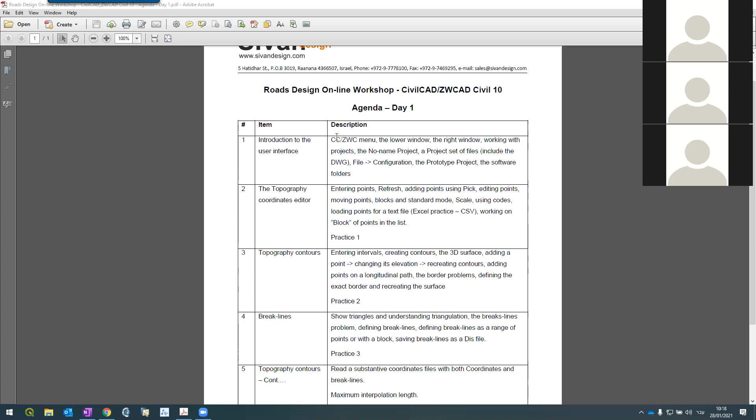We'll go to the topography coordinates editor. How do we enter coordinates? How do we load the coordinates? How do we pick coordinates from the drawing and put them in the list, and vice versa? We'll go through how to use codes. I will explain later how to read from a text file, or in our case, a CSV file, which is actually a text file from Excel. And then we'll see how to manipulate a list of points together as a block.

We'll go to topography contours. We create contours, we understand the concept of 3D surfaces. We'll add points, change elevation, and recreate contours.

Then we'll do a small study that will show you what we call the low border problem and how to overcome it, how to define the border. We'll go into a term named breakline - what it means, where it's coming from, how do we create and save breaklines. Then we'll continue with topography contours with a much bigger file, and talk more about borders and method names, maximum interpolation length. We'll end with something called filtering - a method where you don't have a text file, data, or breaklines, but maybe you have a DWG drawing file, and you can extract the data from it, convert it to your 3D surface, and continue working.

I hope I'm not too fast, and I hope all of you can hear me. Just as a quick feedback, let's start with Gal - am I too fast or is it okay? It's okay. Same for Esomachi - can you understand, can you follow up? Okay, for you, I see you don't have a mic. Let's try with Dareen - is it okay? Madame Dareen, can you hear me? Yeah, it's okay. All right, thank you very much.

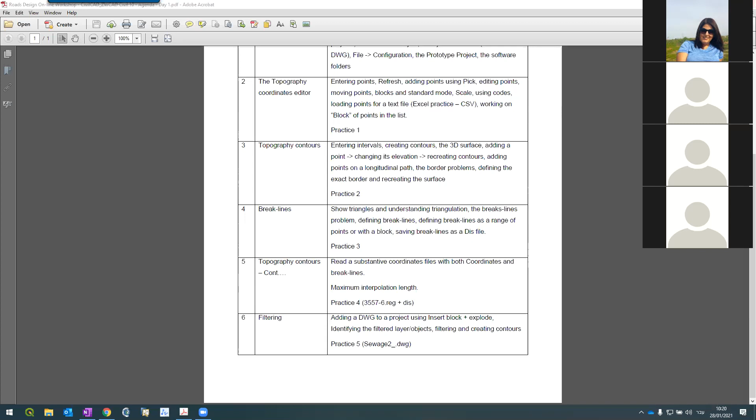Okay, let's not waste time and go into the system. The training is built up in a way where I do the introduction or demonstration on the software, and then after that, I'll give you practice time to try it on your own. So let me start - I'm starting the system.

It launches, and immediately when it launches it starts the drawing environment. I'm using ZWCAD. What is ZWCAD? I'm not here to sell it, but ZWCAD is actually AutoCAD, a Chinese version of AutoCAD. In my opinion it's equal to or sometimes even better than AutoCAD, and believe me, I'm 20 years in this business. But if you like, you can still use AutoCAD if you prefer. In my opinion, ZWCAD is faster and works exactly the same - this is the advantage.

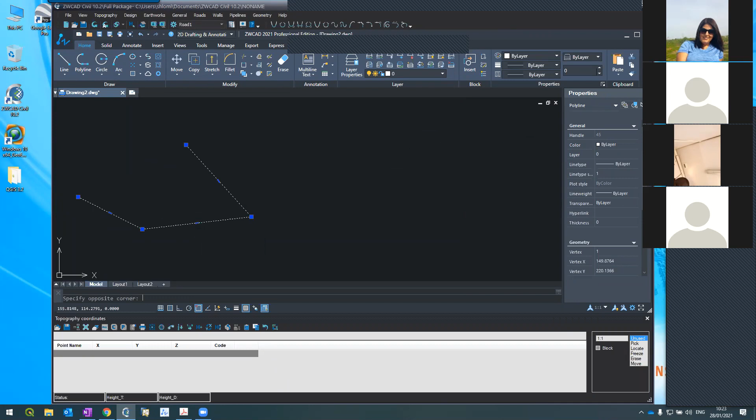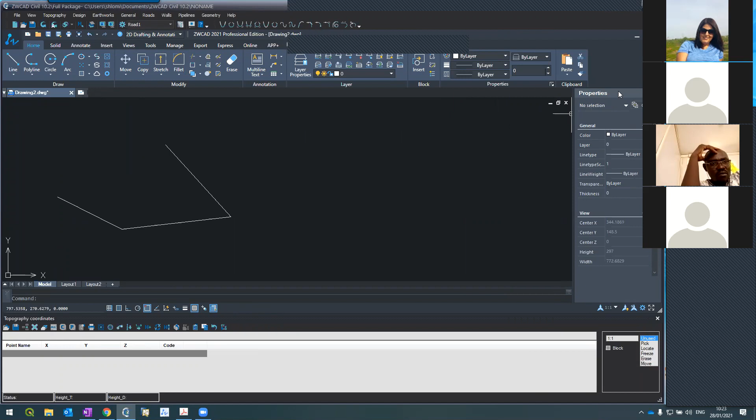Look, this is the command line. If I do a polyline here - same polyline. I want to see its attributes; it will be here. You'll see the properties - if you want to change color or layers, all the commands you know from AutoCAD are here. All the buttons, stretch, everything is here, all the menus and ribbons. It's AutoCAD - it's actually AutoCAD, just faster and more cost effective. So I'm introducing ZWCAD, but you can work with AutoCAD - for me it's the same, whatever works for you. But I encourage you to work with ZWCAD.

Let me continue - this is the drawing environment. On the top, I hope you can follow my arrow, we have the menu of ZWCAD Civil, which is actually CivilCAD - CivilCAD is ZWCAD Civil, it's the same product. Below that you see the toolbars of CivilCAD or ZWCAD Civil - we'll learn about them. Here is your standard ACAD, ZWCAD, AutoCAD - it's the standard. Below we have what we call the coordinates editor. It's an editor, I can type in things here. We will deal a lot today with this editor, but we'll talk about it in a minute.

So this is just an introduction. Very important - I'm working now on a project named No Name. You can see it in the caption on top, showing the full path and saying No Name. All of you, be alarmed not to use No Name - very important, don't use it. Why? Because everything you put in No Name, later the system may erase it and you'll not succeed to save. Don't use No Name - every project should start as a new project. So actually we have two important projects: one is No Name, and the other we call prototype. Prototype - so again, No Name and prototype are the most important projects which we have.

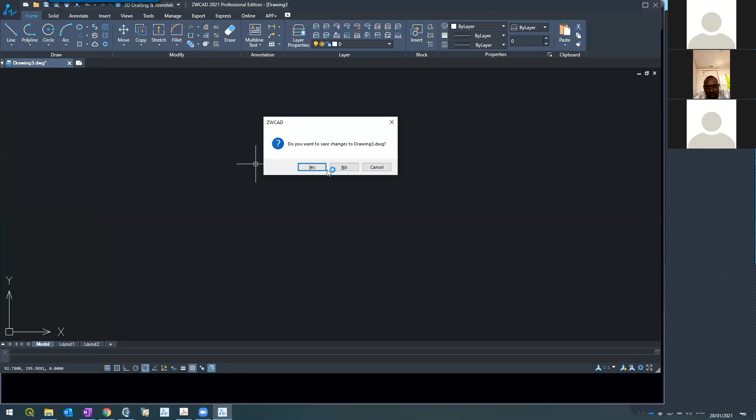Yeah, but let's continue. So what I did, I came here, I did my change, File, Exit, save the changes, and that's it.

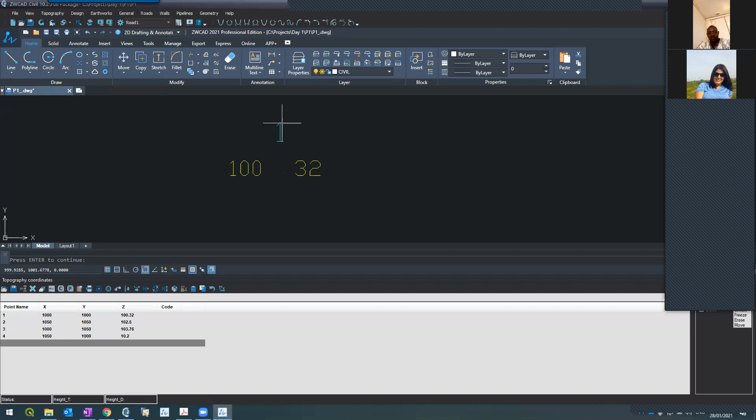The insertion point of the block is 1000, 1000 on elevation 100.32. So actually it's a 3D block where its insertion point is at the coordinate. Actually the insertion point is where the decimal point is, so it's this small one here.

And the same goes here, and the same goes for point 3 and 2. Fine, nice. How do I increase the size of the block?

I don't know if you remember what we said, that our project should work with a scale of 1 to 250. So the software took 250 and created the block size with its attribute ready for 250.

But if I go here in the topography coordinates and press this button, we call it options, I see the options window where I can change and manipulate these things. Now I'm working on topography, on the coordinates, because I have many things in the topography. On my coordinates, I want that my text will be adequate for a scale of not 250, but 500, and I would print.

Press OK, and refresh again. You saw what happened? Immediately the size changed. Let me do it again.

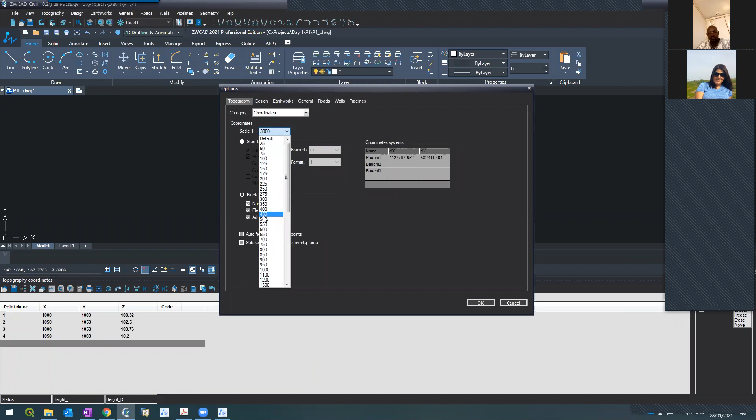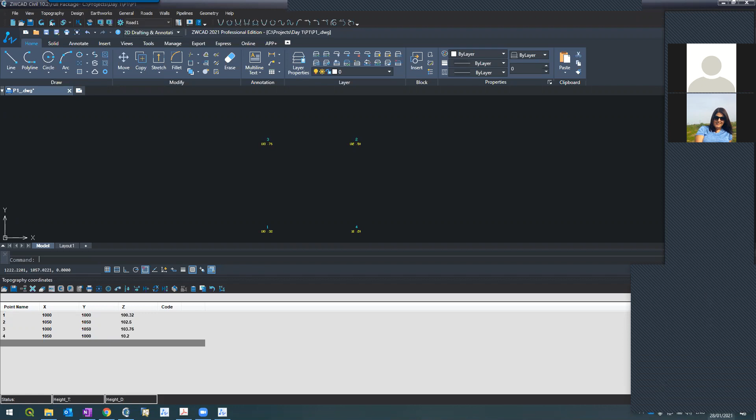Any questions so far? I will give you time to practice, don't worry, but I'm asking whether you have any questions so far. Guys, Techno Spark 4, any question? Are you with us? 8910303, are you with us? Can you follow? Okay. Adamo, Mr. Adamo, can you hear? Yes, yes. Okay, good, no question for now. Thank you. Rose, any question? Rose, questions? We cannot hear you, just write me if everything is okay. Okay, I hope you can follow up. It's very important, it's very important.

What I will do now, you remember I entered coordinates here, pressed refresh, and it showed on the window. Now I'll do a different thing.

What I will do now is use the pick function here. See, I'm going down. Everything below here in this window relates to topography coordinates. So if I go here to pick and press, see what happened in the command line: it says pick point, and gives it a number, 1005. I want to call it point number 100, so in the command line I'm entering 100, and it changed to pick point 100. I'm going to the drawing.

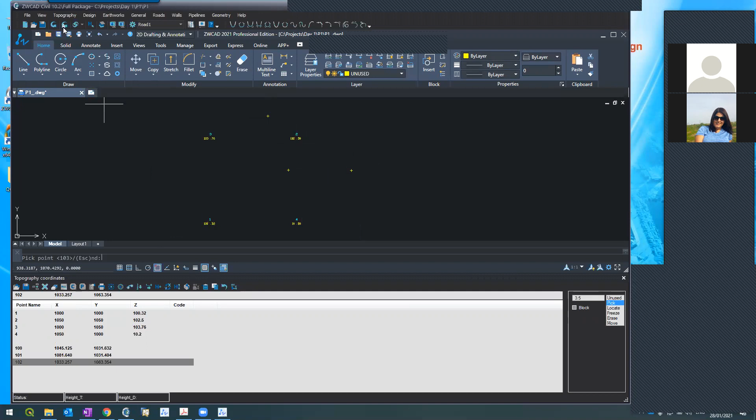And I pick the point here. See what happened here? It created the coordinates, giving it 100 and the coordinates. I'm putting one here and another one here. I'm pressing refresh. Here they are, the points, of course at zero elevation because we didn't give anything.

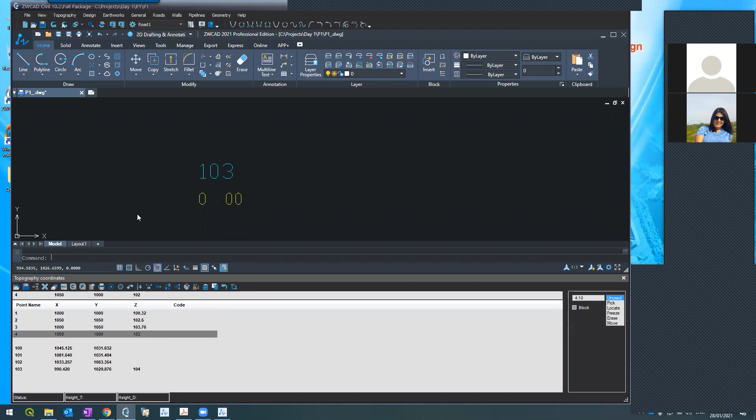So again, pressing pick, it says in the command line pick the next point. I'm clicking somewhere, it shows here. If I refresh, I'll see it completely. I want to change the elevation of 103. I pick it here in the list, come to it in the editor, change it to 104, and press refresh. Here it is, 104. And so on, so forth.

Okay, so we saw how to do pick. We saw that there's a complete interaction between what's going on and the drawing.

But I can also add something else. For example, let's say that point number 3, when I pick it in the field, I've noticed that it's a tree. And in my GPS or total station, I collected it as point number, coded as a tree. I'm going to point number 3, you see the last column, it says code. I'm entering 60, pressing refresh.

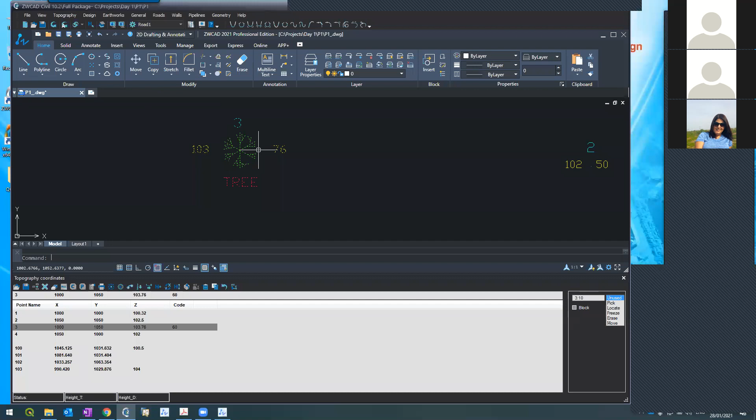And it becomes a tree. See? I entered 60 here, and it became a tree. Let's do the same for 101. I know that 101 is a tree as well.

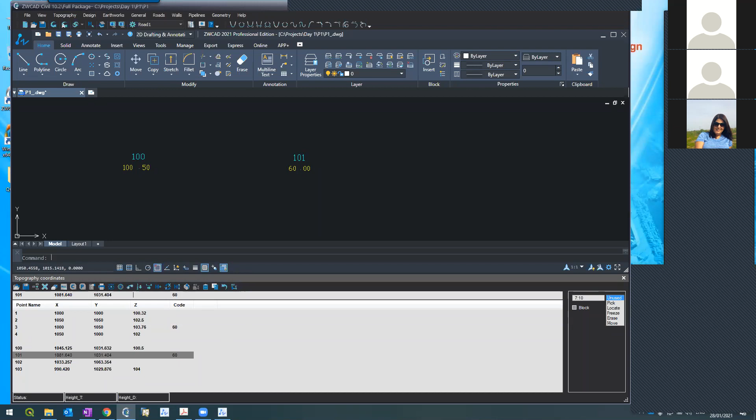60. Sorry, 60 is it. I need to give it a height. We did 0 and 60. Here it is. It's a tree. I hope you got it.

So how do I know these codes? If I go to where my data is stored, in Documents, ZWCAD Civil, you'll see there is a codes folder. If I go to main DWG and open it with AutoCAD or ZWCAD, it's not so important. I started a new ZWCAD. Sorry, not this one, I made a mistake. If I go to main symbols, you see?

Here we are, all these are my codes. So once I have 60, where was 60? Here it is, tree. I have pine, I have invert level. I have for valve, for example.

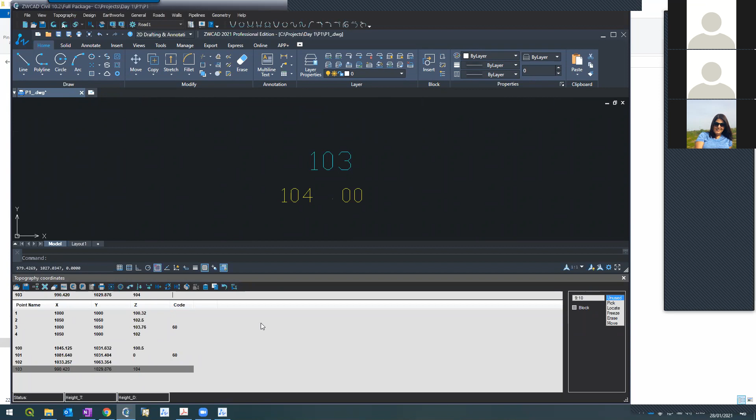47 is a valve. Let's try it in my ZWCAD Civil, 47. I will take this point, 103, give it 47 in the code. All right, you see, it's a valve. So here it is, these are the points, these are the codes.

I hope you got it. And what I'm going to do now is create a file in CSV, load it in the system, and continue from there.

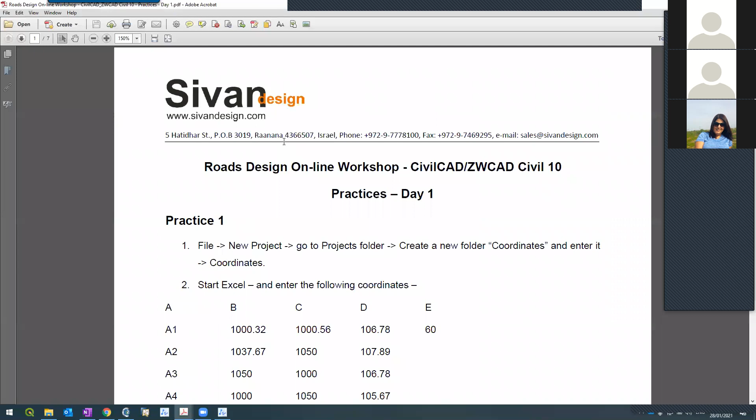So what I'm going to do now with all of you, I'm going to share with you a file which I prepared for this specific training. This is the file. What I want you to do is to all look at the file and practice it. So I'm putting it here. Here it is. Take now 10 minutes and practice the file.

Marina, do you remember how to, I don't know, even if it's possible, how to share with them? Can I share with them the file? Can I send it to them? Is it like Skype? Does it allow sharing a file? Send them a file. I'm not sure, let me check just a second.

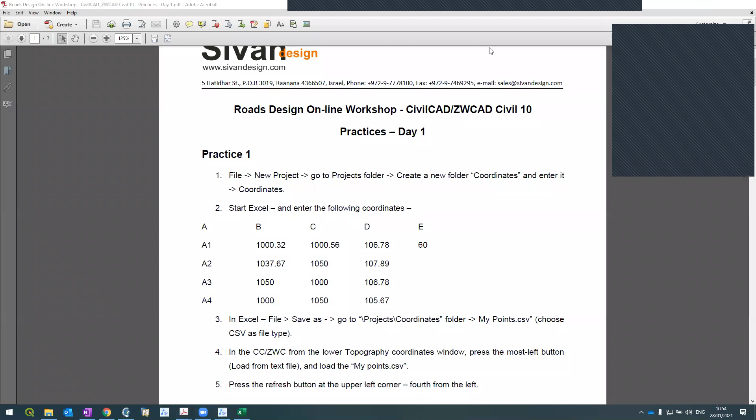Can you hear me? Yes, who is talking please? Gal. Yes please, yes madam. I try to open the ZWCAD and it's not working. Okay, it has ZW, a what? Yes please go ahead. It had a problem to open this, so I don't know. The problem is from the ZWCAD or from ZWCAD Civil? It wrote the license details don't match computer specification, please contact support for further assistance. Okay Marina, can you take control offline and try to solve the problem for her? Yes of course. Okay, try to do it now so she can continue with us. Okay, thank you, thank you.

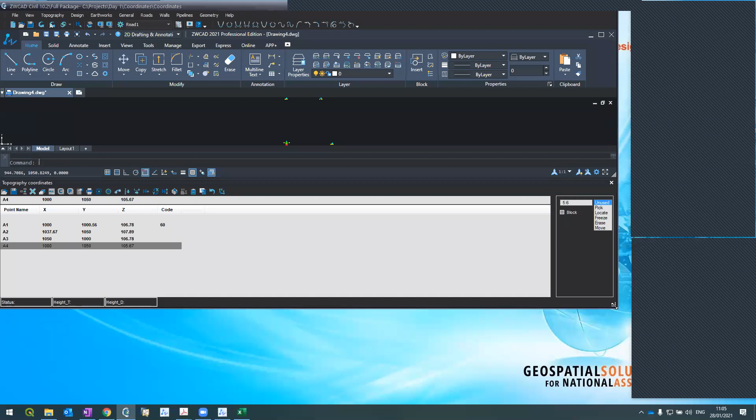What I'm gonna do now, I'm gonna continue to topography contours. So all of you please follow along. I'm going here in the topography contours, and on the right I can see a new window, the topography contours window.

I'm going to intervals and I key in 0.25, which is the vertical interval, and I press apply. Here it is. With 4 points, the system creates contour lines between my 4 points. Moreover, the system creates a 3D surface between these 4 points.

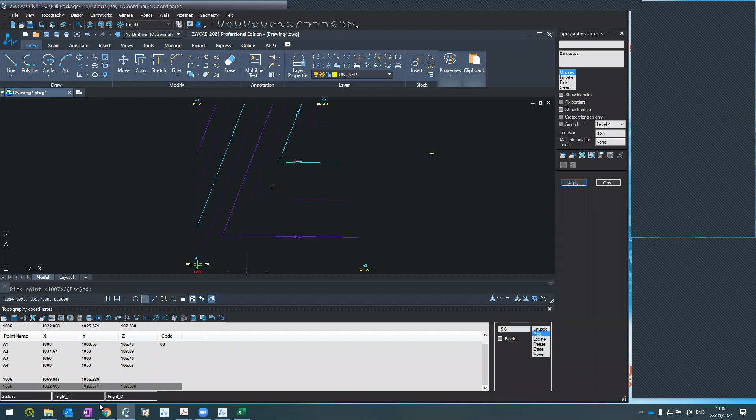That means that if I take my pick, which I used before - you remember when I picked a point outside of the surface, it gives me x, y. But if now I go inside the surface and pick anywhere, even here, automatically I'll get the z as well. See, x, y, z. You can try it. When I press refresh, here it is, 1006. Excellent.

If I take now 1006 and change its elevation, instead of what was existing, I will change it to 112. Press refresh and apply on the right side again. The contour line will change accordingly. I hope you succeeded to follow up.

Again, I went to this point and changed its elevation. This is 106, you see it here? And change its elevation to be 110.55. I'll refresh first, and then I apply again. You see, it's changed accordingly, and moreover the surface changed accordingly. I hope you got it.

Any question to what I just did? Anyone, question? You can speak up, you can write. If not, I will continue.

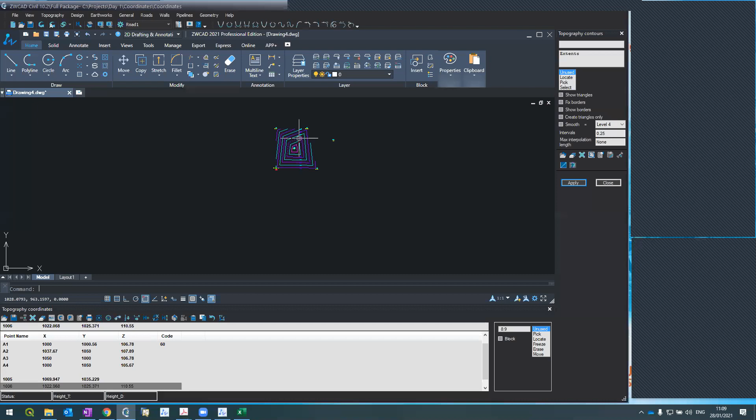That's good. Now what I'll do, I'll create points here. How do I do it? I'm using the pick. Let's assume that from here, from this surface, there is a small path going this way, and I'm having points along the way. So the first point is here, the next one is here, and the next one here - this is one section. Next section is 1, 2, 3. Next section is 1, 2, 3. Next section is 1, 2, 3. And now refresh. These are my points, good. I measured in sections.

And let's enter some elevations along. For 1008, okay, I want to find this one - how do I quickly find it in the list? I'm using the locate here on the right side. Locate, go to the drawing, pick the point, and automatically the software highlights it in the list. Now I can enter the elevation. 1008 will be 107, 1009 will be 107.3, and 1010 will be 107 as well.

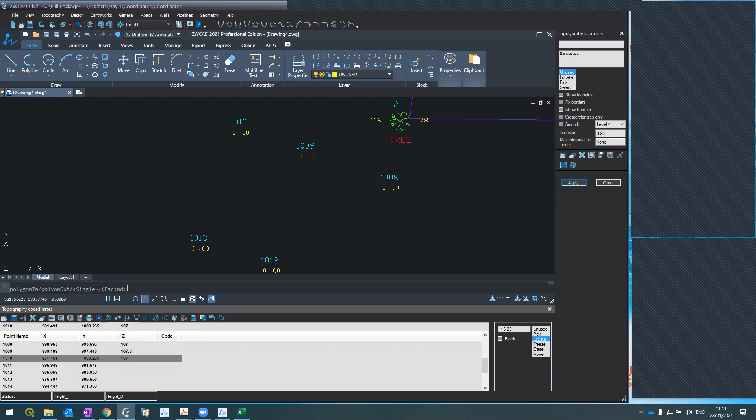And let's continue - 1011 will be 107.3, and this one will be, sorry, I'll put it in - yeah, 107.3. And this will be 107.6, and this will be 107.3 as well.

Going to 14, 108.1, 108.4, 108.1.

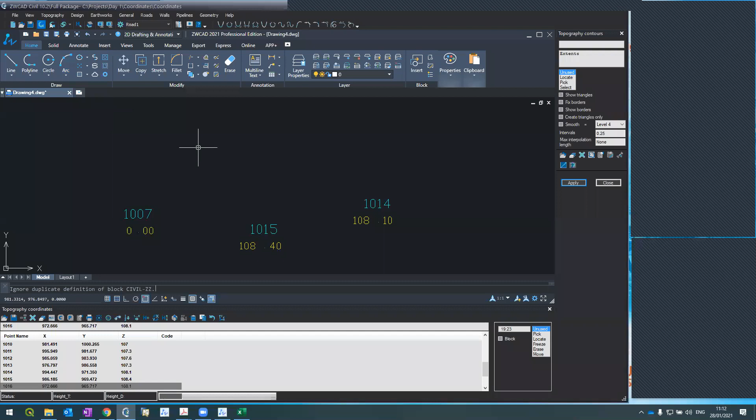And the last one, this one, I want to delete 1007. Let me look for it. Where is it? In the list, here it is. I'm clicking the eraser and refresh. It was removed. Let's continue.

To 17, it will be 109.5, 109.7, and 109.5 again. I'm refreshing.

Here are my points. I'm going to topography contours. On the window on the right, I press apply again, and then I have my contours.

So see what happened. The contours here were created, but the system didn't know that we don't want to create contours here. We didn't know that this is a path. It's actually supposed to stop here, but the system also created contours here. What do we do? How do we avoid it?

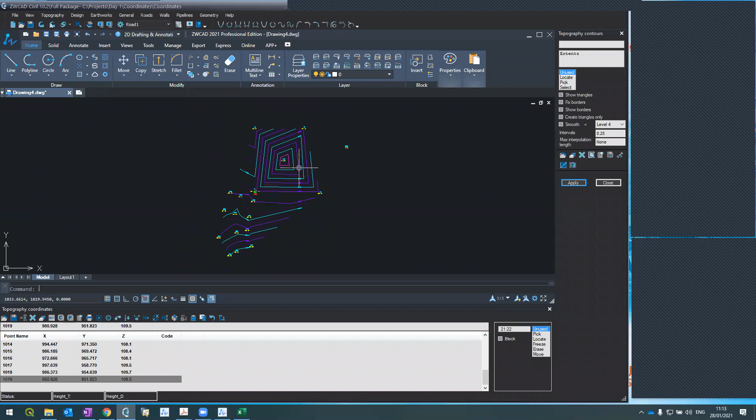I will show you several ways. The first one would be to use the border. So in this topography contours window on the right, I'm clicking locate.

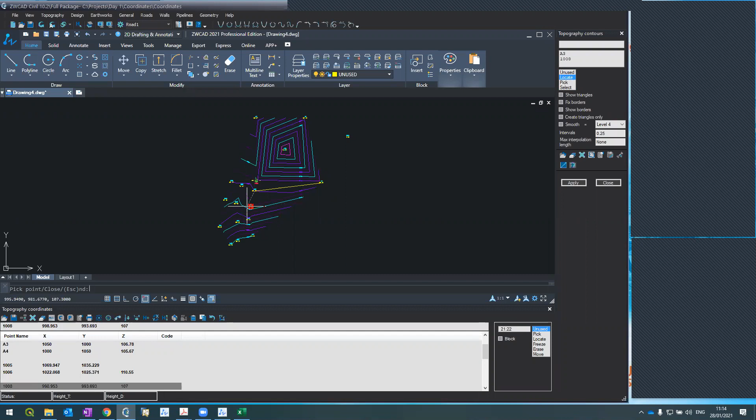I'm clicking locate and start marking my border. I'm starting from here, here, here. Every time I pick a point, it appears here on the right, and the system highlighted in the list. I keep picking points. When I want to finish, I press C in my command line for close, and enter.

And then apply. Then the system limits my contours into my polygon.

What I'm asking you to do now is the same practice that I did. You can do it in the document which I shared with you, named Practice 2. You can also look at the elevation which I entered here, so you know which elevation to enter, so you'll have reasonable data. It's not so important, but still. Take 10 minutes, exactly 10 minutes, so we'll pick up with more information today.

At this point, like I did, pick, pick, pick, pick, and enter the elevation to this point. If you don't remember, you can use Practice 2 in the document which I sent you. Take 10 minutes please. If you have any questions, I'm here.

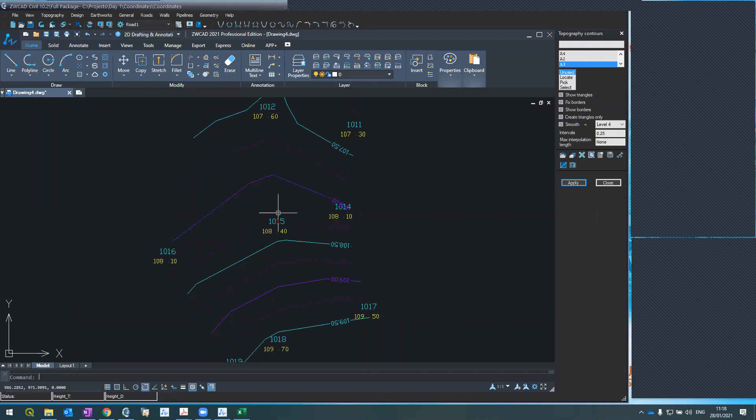Attention for one minute everyone, I want to explain something. What the system does is create each interval in a color. So in this case, you see that each half a meter is in light blue.

Each 25 is in dark blue, like this one. We can hardly see it. Each 1 meter is in a different blue. So these are the colors. The system creates colors to differentiate the elevation. Of course this is a small example, but you can see it here: this is 1 meter, 1 meter, 25, 25, and 50.

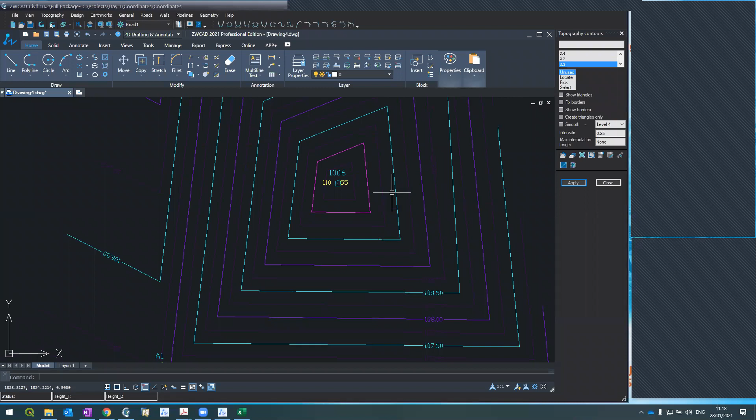It's in layers, so if you go to the layers in ZWCAD, you'll see. Where is it? Here it is. The system creates a few layers. Tick on to 0, 1, 2, and 3.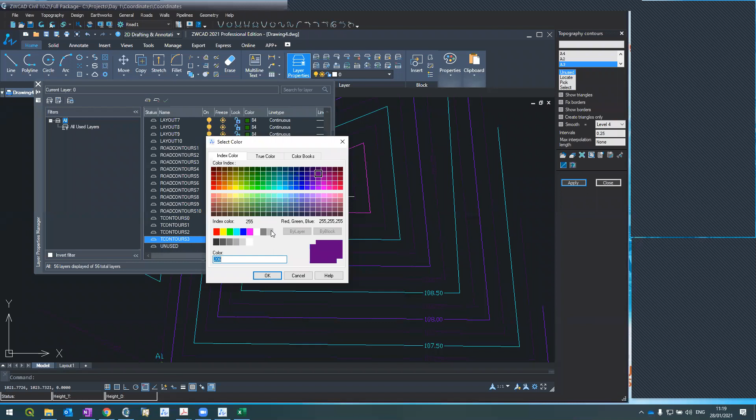For example, if I want to change this, the 0.25 to be seen better, put it here. Okay, maybe now it's better.

By the way, I can change this color in the prototype. If I open the prototype DWG, named prototype, and change it, then every new layer will get its color from the prototype, for any new project. More questions?

Did you succeed to create this small path which I created here? Did you succeed to create the borders? Mr. Majid, are you still around? Because you said you are going. Majid left us. Dareen?

Where is the point? I could not locate it. What do you mean? What do you mean, I couldn't understand what exactly. When I make a path, yes, I put locate, right, so I locate most of the points. Then when I arrive to a point, it doesn't click. I don't know why. Can you share your screen so we try to see together?

Maybe I don't know how. I will allow you, allow. No, I think you can. Share screen, make host, okay. Try to share your screen now. Oh, share screen, yeah, no, it was not. It was disabled, I allowed it to you.

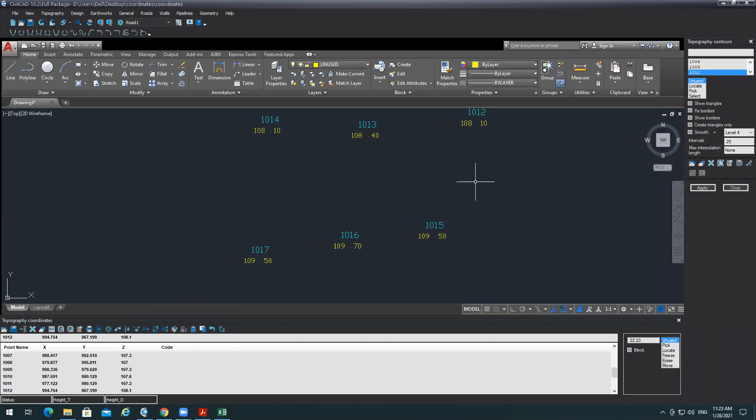Try to recreate the borders, I think it's the easiest. Press X on the right. Press X on the right. There's an X... no, topography contours.

Where have you been? Yeah, on the right there's an X on the button, a button with X. Yeah, yeah, this one exactly. Clear all borders. Yes, yeah. Okay, now I'll locate again.

Yeah, let's see if it goes now. Locate.

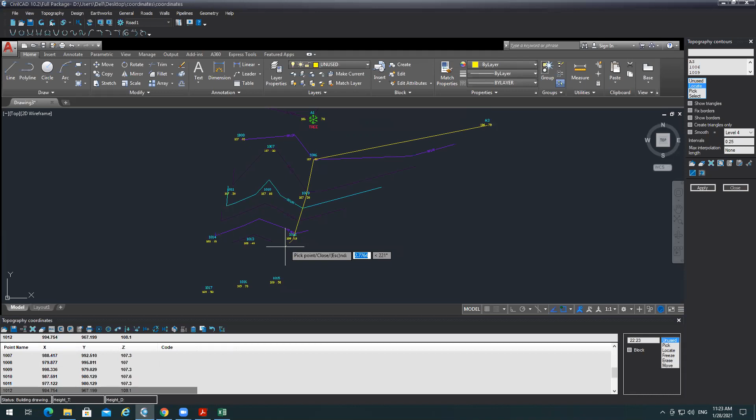It's the same problem at the same point. Yeah, very, very strange. This is the first time I'm seeing something like that. I get the idea, but I don't know why. Yeah, no, I understand.

Try to grab 1013. Yeah. Very, very strange. Okay, I'll continue with that. Yes, but... no, you cannot pick a tree block.

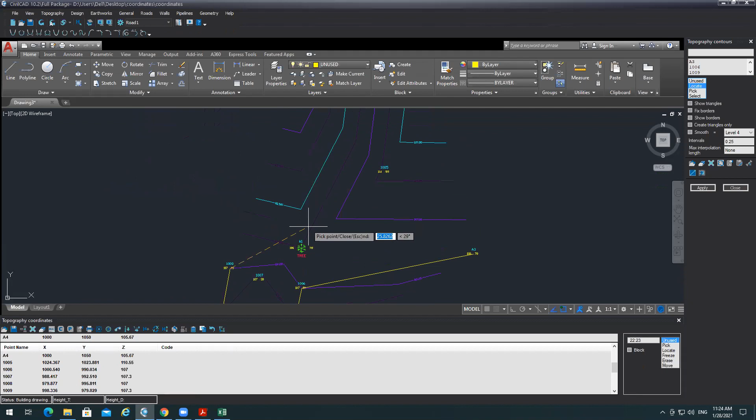Okay, yeah, oh okay. Stop sharing. Okay, no.

Okay, you need to make me a host. Doreen? Oh yeah, I hear you. You need to make me a host. Click on me on the list, on Sivan Design, yeah, on the list, on the list in participants. Click Sivan Design, yeah, more, and make host. Okay, yes, thank you.

How is it going for the rest of you? It's going well. Going well, good. Going well.

So you succeeded to do it? Nobody encountered the same problem, we cannot pick a specific point? No, none. Oh, okay.

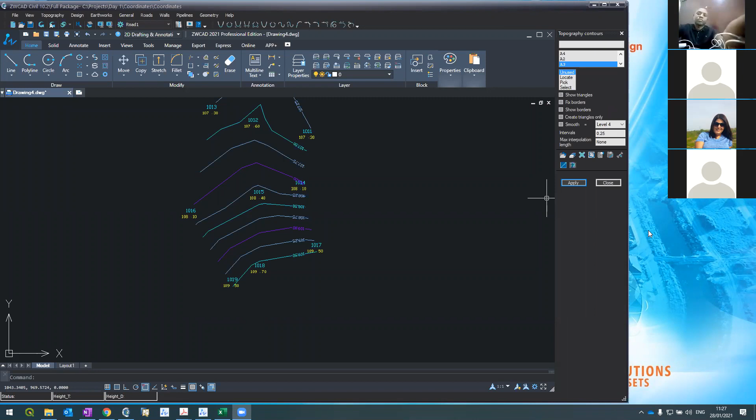Okay, so the rest of you have done your borders, so you saw how to fix the borders. Fine, this is very good.

Now I want to talk about something, and I want all of you to pay attention. My question to you: do you need a 5 minute break, or can I continue? It's an open question to all of you. Continue, continue, this is Lawal.

What does TechnoSpark 4 say, that we see him? He's on audio, what do you say? He doesn't hear us. Hello sir, good morning. Yeah, we cannot hear you, we just see your face. Do you catch up, do you need... oh, good morning, I hope you succeeded to catch up. Do you need a break or can we continue? We can continue, okay.

We can continue, fine, so I'll continue. So this is where we stand, we have these coordinates here.

And now I want you to listen very carefully, because I'm going to talk about something very important, named breaklines. Breaklines. So listen up, you have to catch it. It's essential for all of you, whether you are a surveyor, construction company, designer, no matter what, it's very important. So please pick up, please follow, it's essential.

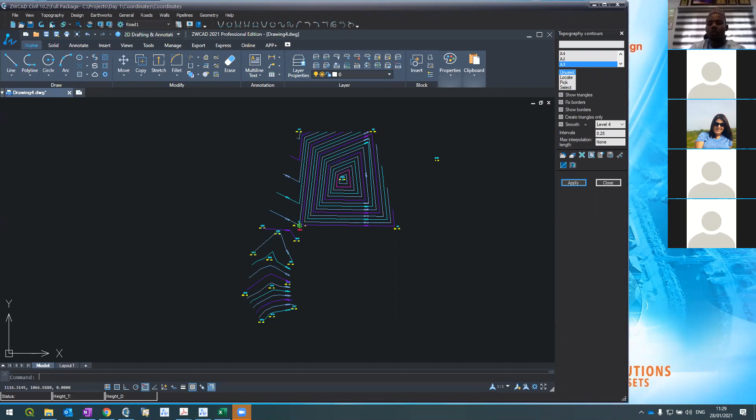A breakline means it's a geometry problem, but the geometry problem affects what's going on in the field. We use breakline to create a break in the interpolation. Now, before I explain further, let me show you something.

I'm asking all of you, in the topography contours window on the right, click the show triangles. You see it here? And then press apply. See what happened.

We see the triangles that the system created for the interpolation. And this is the entire trick.

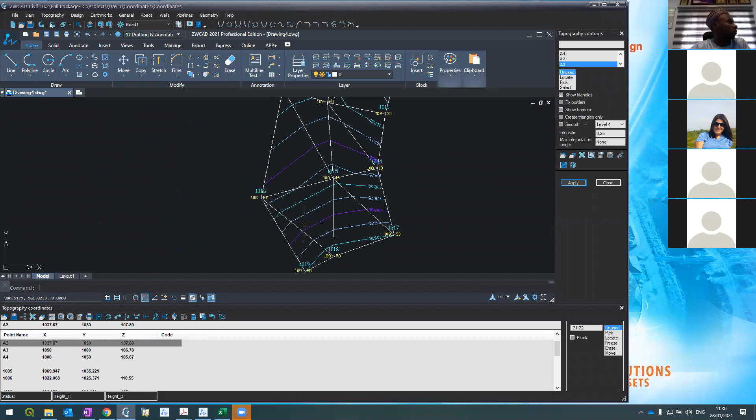Then the system creates triangles between these points and does interpolation. The interpolation creates a surface and contour lines. This is the trick.

By the way, let me remove my border and press apply. This was the problem - the system created a triangle from here to here and from here to here, because the system didn't know that in practice we want to stop the triangles here. So we have to manually tell the system, go along, and change the triangles.

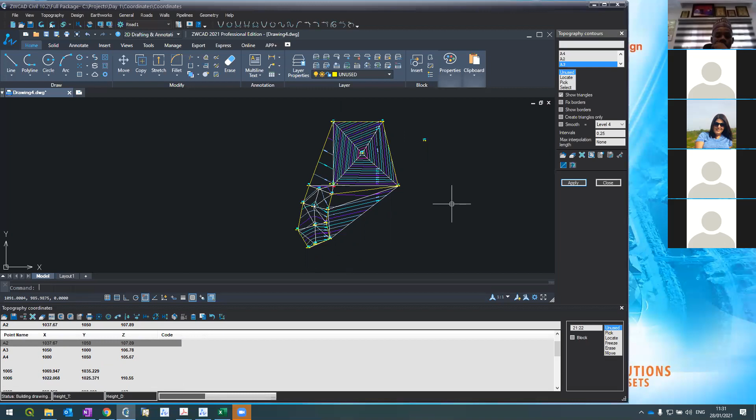Fine, now I want to talk about a problem. Let me remove the triangles. I named this problem the breaklines.

Now, this is the edge of my path - you want to call it a road, a path, or whatever you want to call it. You see this point here, it marks the end of my path. Let's assume from the end of this path here, there's a small cliff going along. I hope you got it - there's a small cliff going along here.

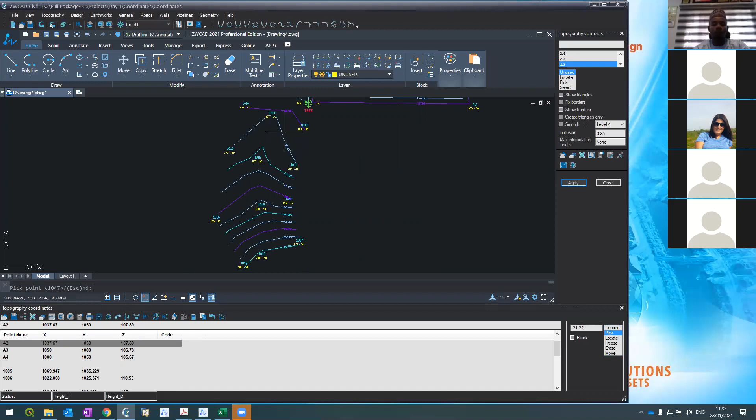What I can do is use the pick tool and pick points. Let's assume that I surveyed the top of the cliff. So I surveyed 1 point here, 1 point here, along the cliff, 1 point here, 1 point here. I went along the top of the cliff and surveyed it, and here - this is the top of the cliff.

I'll refresh it. And on the top of the cliff, to each point, let's enter the elevation - here is 107, 108, 109. I will choose 112, 112 here, 112. Now I want to show you a trick.

Instead of going point by point, I can mark 1050, hold shift on my keyboard and mark the last one, 1052. I marked 1050 and by shift I mark the entire list. Then I click block here. There's a block here, I marked. What happened now? I captured all these points together as a block.

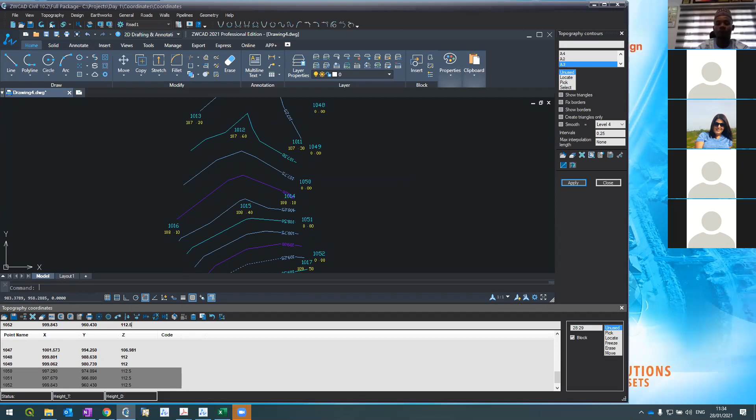It means if I go to the elevation field and give it an elevation, let's say 112.5, it affects the entire rows in the block. I press refresh, and I've done it. I've done it - good. So I have all the points here, here, here.

And now I'll tell the software - let me remove the borders because I expanded the border, so the software can recalculate - and apply. See what happened now - the system does the interpolation. Oh, see what happened. Let's ignore for a minute this side because this is the border.

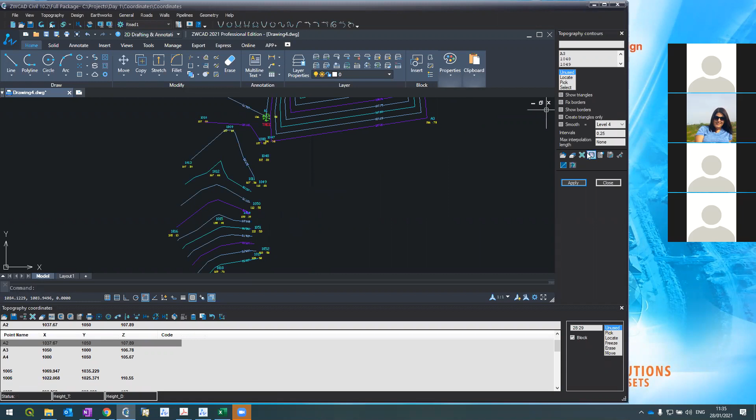You know what, let me reselect the borders. Here, here, here, here, here, here, here, here, here, here, here, here, here, and close and apply. Yeah, so this is my new border. I didn't pick the right one, sorry - again. Okay, this one, this, okay, this time around I will pick this one.

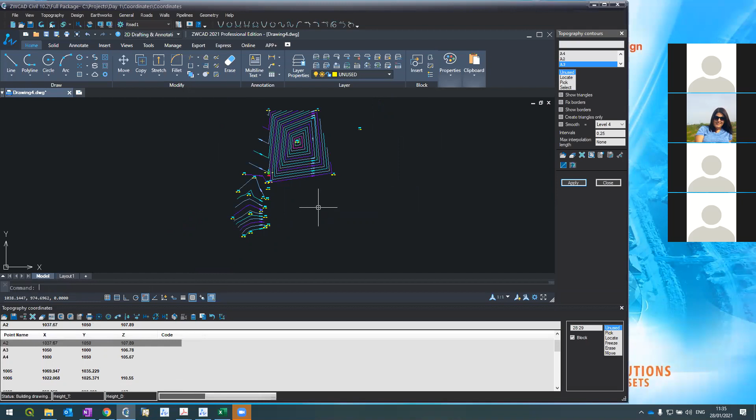Right, and this is the problem. You see what happened here? You see what happened here? This is okay, this is the cliff. This is okay, this is the cliff. But see what happened here.

And the question is why - why did the software create something like this? Where I would expect that these contour lines would be all along showing the cliff all along. I hope you got it. The problem is what we call breakline. If I'm telling the software show triangles, see what happened.

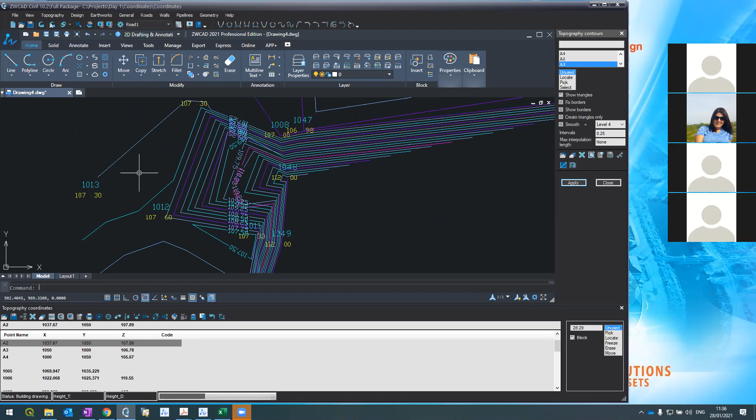See, this is the problem. You know what? It's better entertained here. See here, the points here.

Let's have a look at this point, 1051. It interpolates from here directly to 108. But we want it to break here, along here somewhere. Let me do a schematic thing. We don't want it to interpolate more than this.

We want it to stop because we know this is the side, but the software doesn't know that. It doesn't know to stop here, so immediately it's interpolated to the nearest point. How do we solve it? We call this the breakline problem. How do we solve it?

I'm going to topography, lines. And on the right, I see a window. The window consists of two parts, upper part and lower part. The upper part describes each line. Here we have the lines list, so we have only one which is empty, line number 1, which is empty. And on top I have all the coordinates that assemble point number 1.

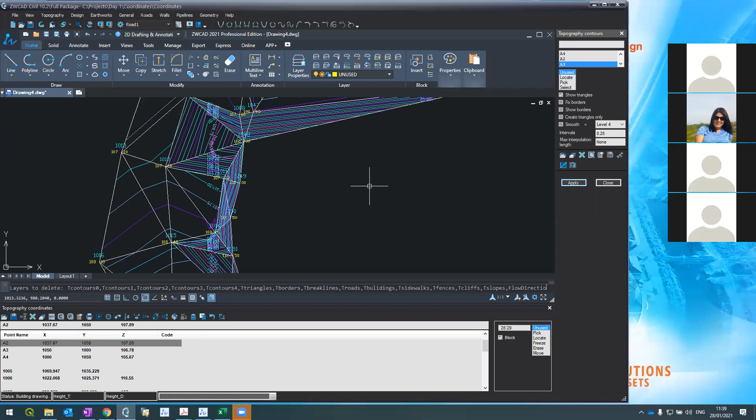How did I do it? Locate, finish. When I finish, I press Esc and enter on the keyboard. Then I go again to the contours and apply. Here it is, you see?

All right, we have a problem in the breakline here. We'll check it in a minute. But here it is - I recreated the breakline, and the system automatically did it. Let me try again.

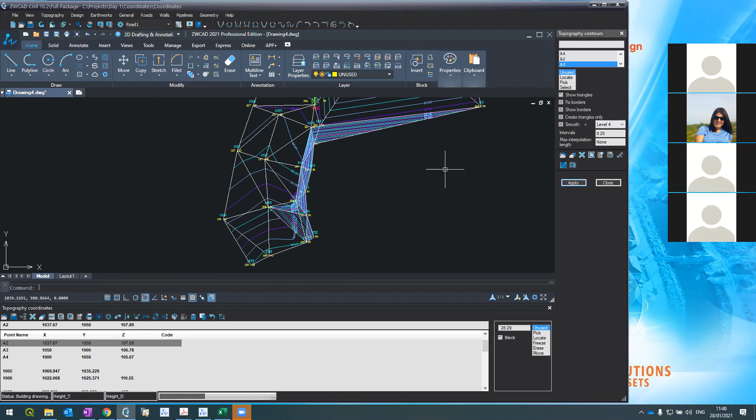Okay, so this is it. If I want to create another breakline, for example one that will go from here to here, because I want, again, topography lines - I'm clicking, I'm hitting here the new line. Then it starts line number 3.

I locate from here to here, S on the keyboard, and I refresh my surface in topography contours, and it continues, and then it continues.

I want you to have a look, practice it by yourself. For this, what you need to do is practice number 3. So I'm asking all of you, go and do practice number 3. If you have any question, I'm here to help. But it's important, it's essential that you understand the concept of breaklines. So please go ahead.

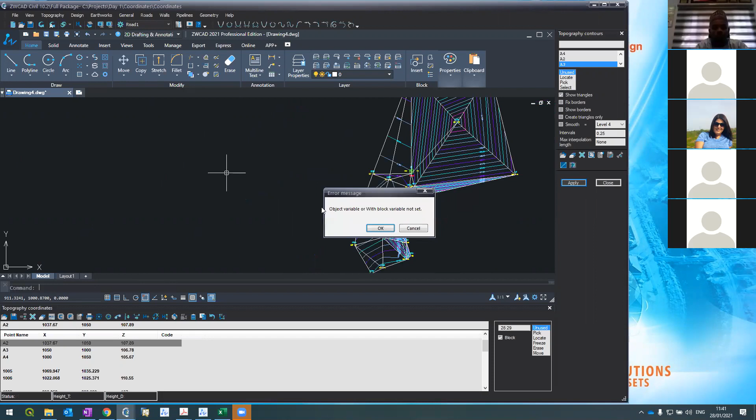If you have a question, let me know.

Hello, good morning. Good morning. Who's talking, please? My name is Mohammed Abba from Maiduguri, Borno State. Yes, please - can you give me access to record the session if possible, today? Pardon? Access to - I mean, I want to record the session if possible. Can you give me access? No, we are not recording. We are recording ourselves, and then we will distribute it to all of you. You will have a recorded session at the end. Okay, all right, thank you.

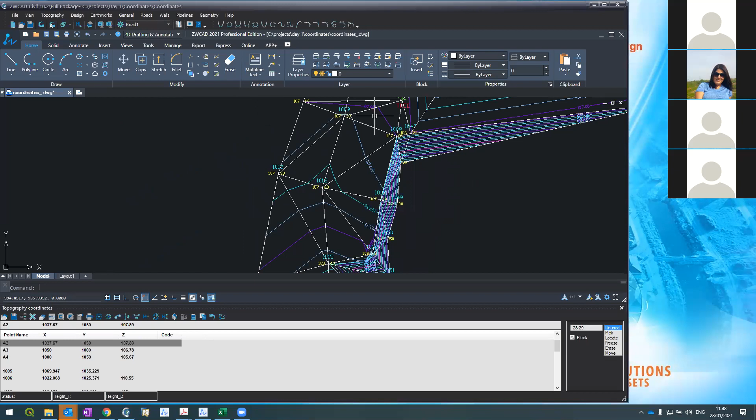Excuse me, I know how to make a breakline, but now I want to make the new border, and when I press locate, it doesn't give me anything. I couldn't locate a new border. Completely. Yeah, completely. When I press locate, then I press escape, it doesn't escape. It highlighted locate, and I couldn't escape, and I couldn't locate a border.

I want to ask you, are you using the same version which we distributed specifically for this course? Yeah, CivilCAD 10. No, but CivilCAD 10 has different versions - which release? You know, we sent an email yesterday to uninstall and install the version. Yeah, I have 10.2. But 10.2 also has different releases. Did you do the uninstall and install according to the email from yesterday?

No, really, I didn't. Okay, so this is the problem. But I've been working on this version since we bought it. I understand, but please do the uninstall and install. It was specifically designated for this training, so please use it. Just follow the instructions there. You can do that for the next training, but it's not important right now, okay.

I know how to do a break line. Good, just continue from that point. Follow the instructions next time and just uninstall and install the version we created specifically for the training. Very important, okay, thank you. Now let's explain what happened before.

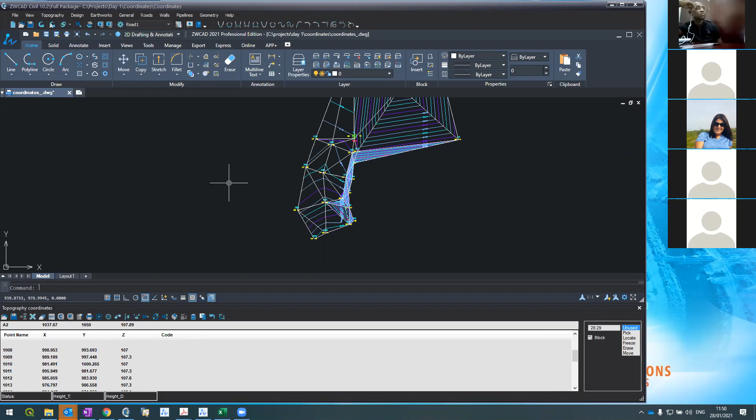Okay, now, once we use a breakline, if I go to the topography lines, I can save the breakline as a separate file. If I press save here, then save as this file, it creates what we call this file type. This file is a file of breaklines.

Again, on the right side, I click save, save as this file, and I'll call it... coordinates. You know what, I'll call it breaklines instead. Okay, now I have this file. In this case, I can use this file in another project if I want.

So for this example, what I'll do now is open a new project, and this will be the last session we're doing. Sorry, actually we have 2 more sessions left in our training.

Do you need a break? Gal, do you need a break? Anyone? Yes, yes, yes. Are you okay? Yes, we need a break. Who is talking? Muhammad is talking, Muhammad Abba. Okay, you need a break. But please don't go far. We're taking 10 minutes, exactly 10 minutes, and at 12 o'clock we're starting again. We have an additional 20 minutes and then we finish. Okay, so please, 10 minutes. Thank you, thanks guys. I'm leaving it open here. In 10 minutes we continue. Thank you, thanks.

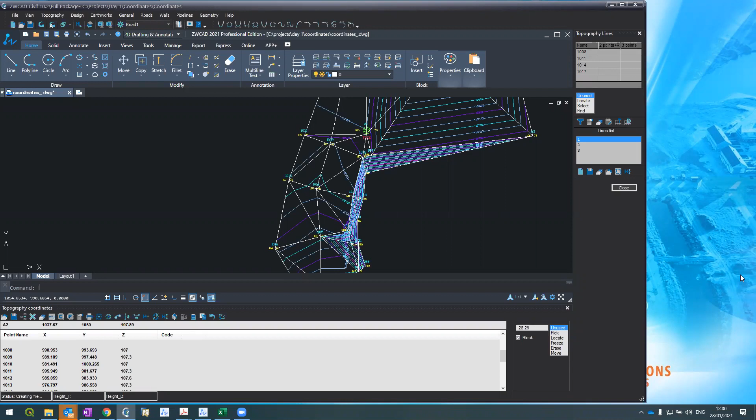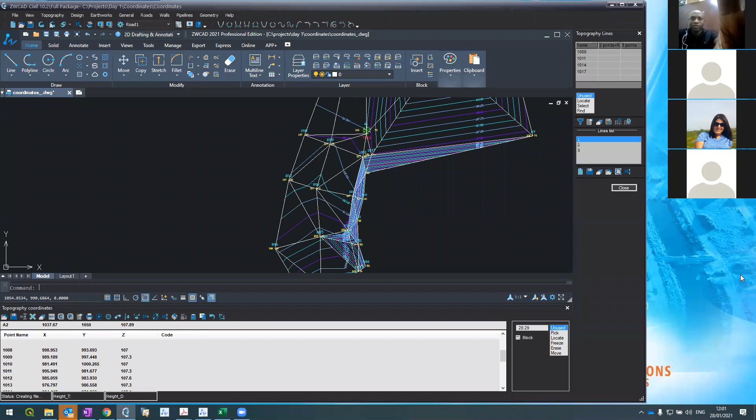Mr. Muhammad Abba, can you hear me? Mr. Muhammad Abba, are you here? Yeah, I'm here. Okay, did you succeed in following the training? Yeah. Okay, good, thanks. And Mr. Hakim, what about you? Mr. Hakim? Nothing from Mr. Hakim. Mr. Hakim is not here, he was here a minute ago. Adams? Mr. or Mrs. Adams? Do you follow? Yes, I'm here. Okay, thank you, thank you very much. May I continue, please?

Yeah, so let's start. I'm starting a new project. File, new project. And I'm calling this project P2. In P2, I'll give it a name, project P2.

Now, here in P2, I'm going down, and you remember before we read a CSV file. This time I'll read another file, very similar, named .reg. I'm going down, pressing the lower left button, go to Documents, ZWCAD Civil, Samples. Here I can see 35576.reg. I open it. This is the list.

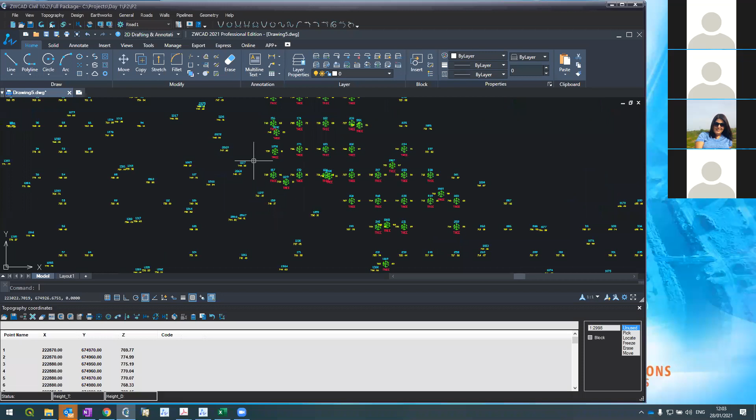Press refresh and wait. Here it is, these are the points. Now I'm going to topography lines.

And this time around, I'm reading a pre-ready file, so I'm using the load function here. Again, reading 35576, read file, I press yes. Here it is, I can see the list of points, the break lines.

Now, if I go and create topography contours, let's say 0.5, press apply.

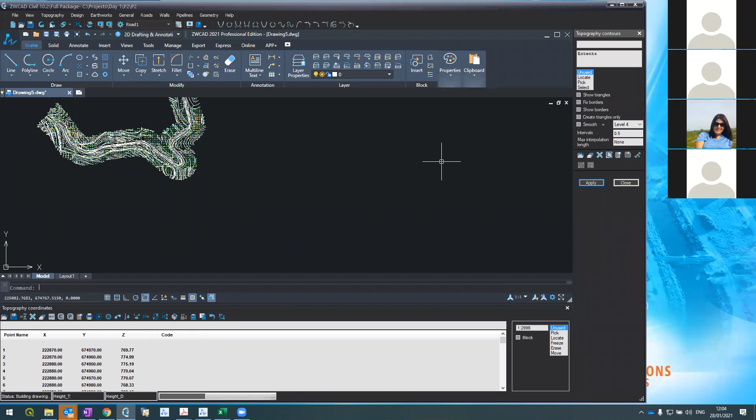See what happened, the system created the contour lines. You see exactly the break lines and everything. But the main problem, like we had before, is it creates long triangles here. If I do show triangles, the same problem we encountered before, but in a much wider area, is now repeating itself here.

So what we get, you see, this long interpolation here and here, which they don't really exist.

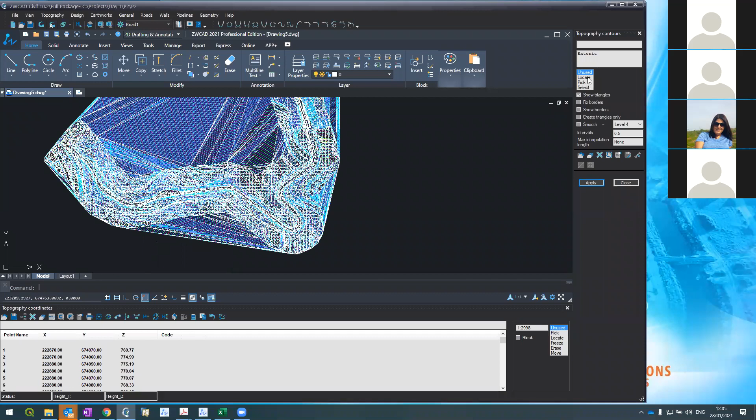Now, of course, we can use the same method of locating all around, but there are hundreds of points surrounding this place, so I have a better method.

What I can see is that the points here are surveyed. I don't know if it was GPS, remote sensing, orthophoto, whatever, but it's not so important. What is common to this interpolation is the distance. You see, the distance between here and here is very far.

In fact, what I'm telling the system is this: each point which has a distance more than a certain value, don't interpolate. For example, I will say 60 or 70 in this case. That means if the distance between this point and this point is more than 70, the system will remove the triangle. Let's see what happens, and I will apply.

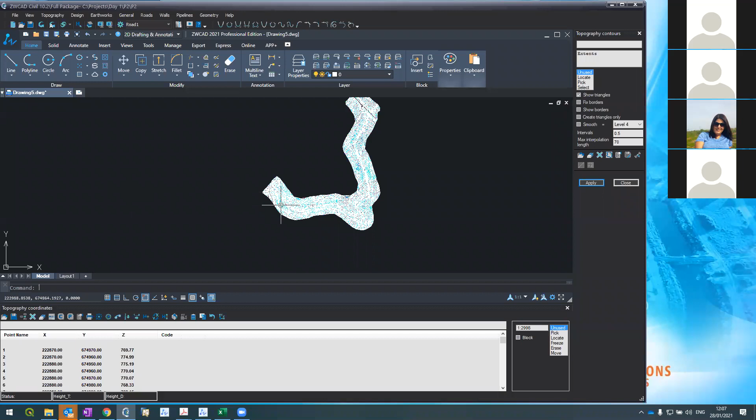Okay, so we just learned another method of how to fix the borders. Before we did it with locate, and this time we used maximum interpolation length. I want you all to practice it quickly.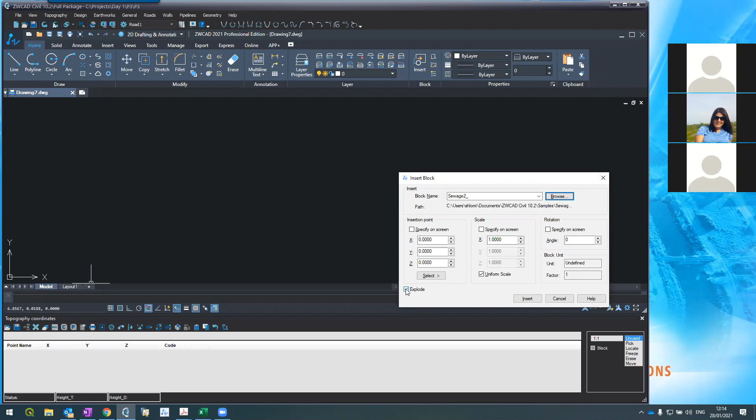Then in ZWCAD, I'm doing Insert, and selecting the DWG file I want to use. This is the file. I tell the software insertion point 0,0,0, scale 1. I'm not touching this, and I want to explode it. I'm marking to explode and insert.

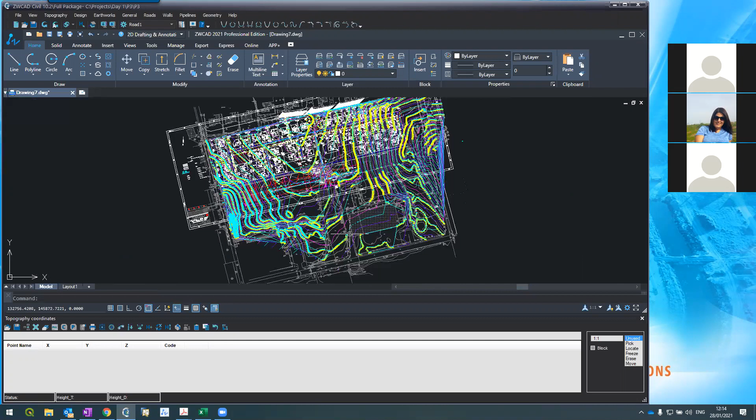Zoom to extents. This is the drawing, where I have points. You see the gray, these are points. But I only have DWG. Now I know that to create a 3D surface, I need points here in the list. This is something that I know, right?

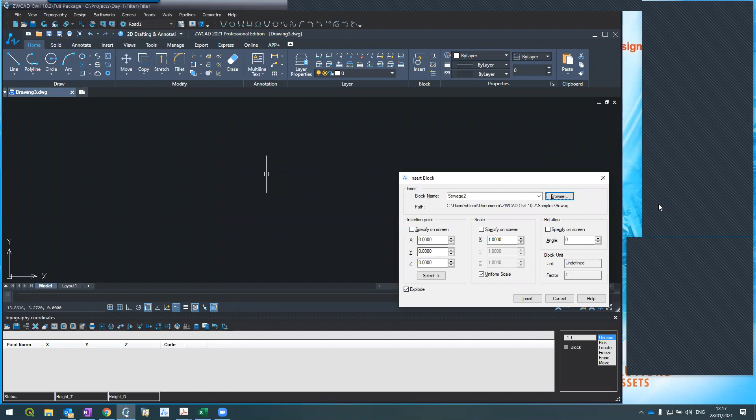Switch to, and I tell it, put it in 0,0,0. Actually, I'm entering the block and exploding it immediately. Let's let ZWCAD finish. Okay, here it is, it's a DWG.

If I look deep in the DWG, I see there is a layer with some points here. You see these elevations. Here I see some elevation, here I see elevations. I have a lot of elevations along the road.

What I'm going to do now: I will use this layer to filter, or extract, the points here in the DWG. How do I do it? First, let's see what it is. I'm clicking on it and doing a list. I see it sits in a layer named MED, and it's a block entity, insert, with a Z value of 55.6. Fine.

Then I'm going to General, Filtering. I get the filtering window on the right: General filtering.

And I get the window on the right. Now it gives me the list of layers and the list of entities. I know it sits in MED and it's a block. I can either pick it from the list or use select, go and pick one object and press enter, and automatically it finds that it's in MED and it's an insertion, a block. The system did it for me instead of me picking.

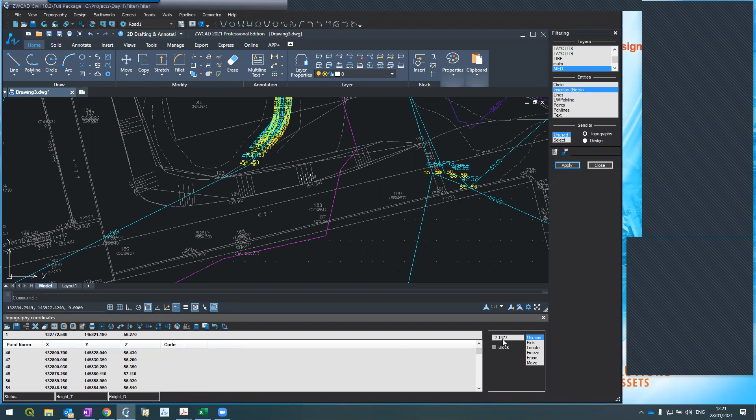Actually, I see that 1,377 points were filtered. I can see it here. I'm pressing refresh. And that's it. Now it's a regular list of points. I can use it regularly. You see all the points here.

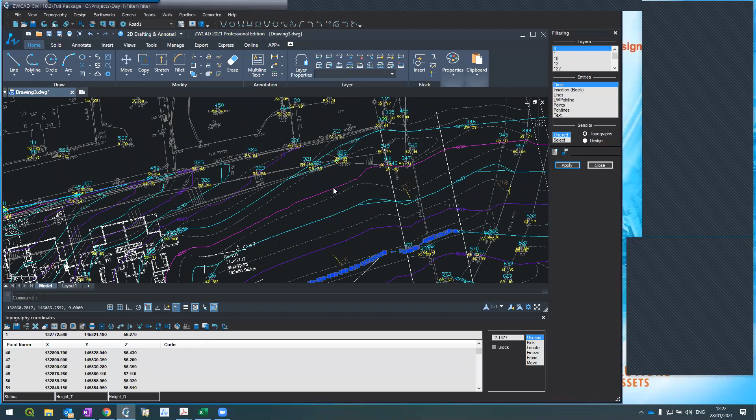You can see it. Everywhere there was a MED block, the system recreated and created its own block with its own point. Now I can continue regularly.

Topography, contours, 0.25, for example, and apply. The system will create contours.

System creates contours, let's see. Okay, there are contours. Oh, but see what happened here. There's a problem here, and here, and some here, and here. Many problems. And the question is why?

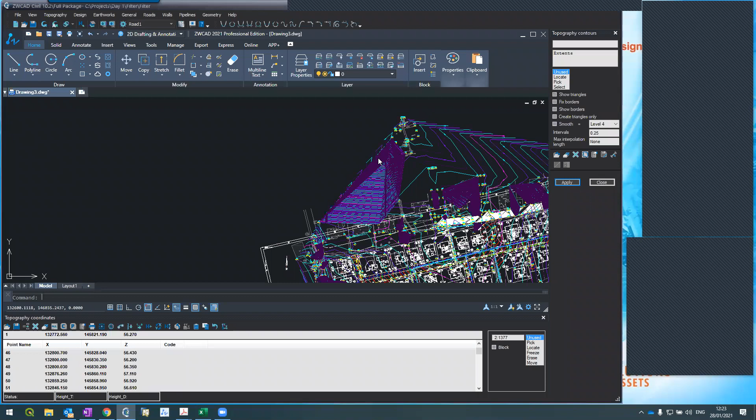Let's see this point, for example. Oh, I see the problem. The problem is that the filter gave a result of zero elevation. You know that ZWCAD Civil, if you remove the elevation, it's okay for the system. It ignores the point when you do the surface.

But when it's zero, it's a different thing. We want to trace it. I'm using locate. I'm selecting the point. Here it is, it's zero. See here, you can find it here. See, it's zero.

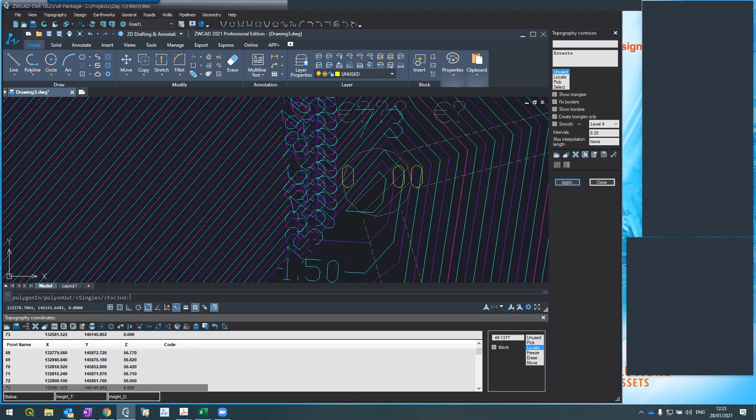Now I can go one by one and trace all these zeros, but I can do another thing. You see, there are many abnormals here. All these are zero.

But I have another option. I'm pressing find. You see this telescope here, binoculars here? I'm pressing it. It says find, and it asks me what to find. I said, find all the points that have a height which, at most, let's say 5 meters.

Well, now we see that the average elevation here is about 54. You see it, 54 here, 54, 54. So I want to find all the points that have an elevation which is below 5 meters, at most 5 meters. Find all.

Okay, system highlighted this. Let's scroll down. Probably there are more, we know there are more. Oh, some we'll find here. Okay, actually the system highlighted all these points that have a zero elevation.